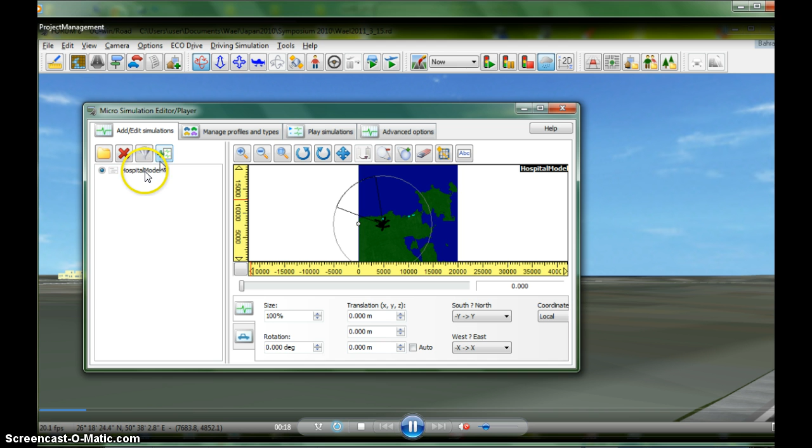As we see, we started from tools, microsimulation player, then uploaded a certain XML file inside the microsimulation player, then executed the construction process of the XML file. Inside the XML file, all the structural elements are controlled according to the time and different variables.

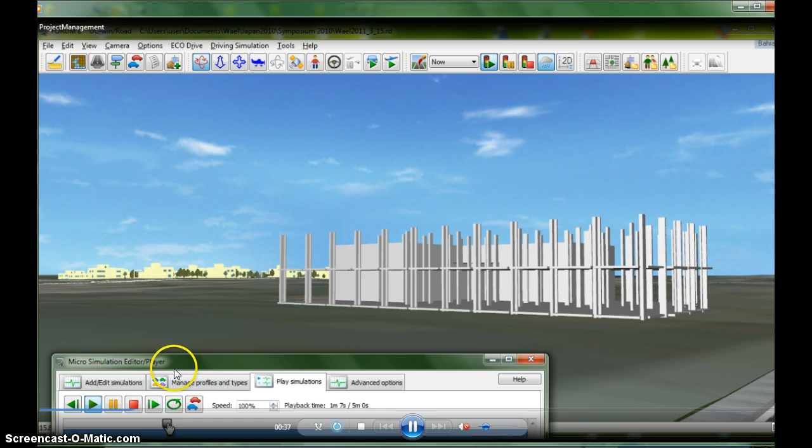As we see here, through the player, the user can accelerate the process, stop or pause it at any time, then go to different camera positions, or even navigate inside the construction or the structure, as we are going to see right now.

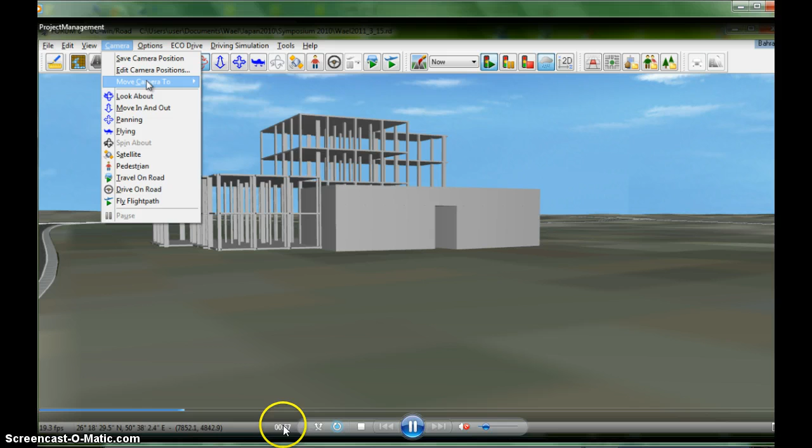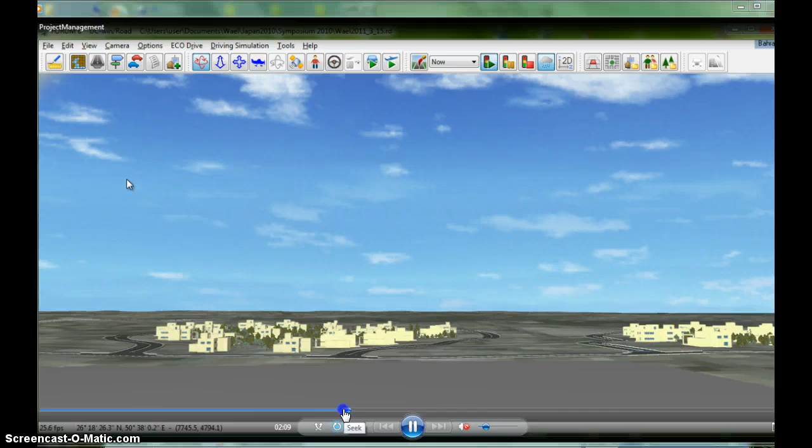I'm going to accelerate the video a bit. Right now, yes, it is the camera inside the structure, and it can navigate in different directions and even study or test the surrounding environment.

This is according to a certain scenario. As we see in this scenario, we stopped the construction process here in the left part, these two stories, then we executed the whole construction process quickly.

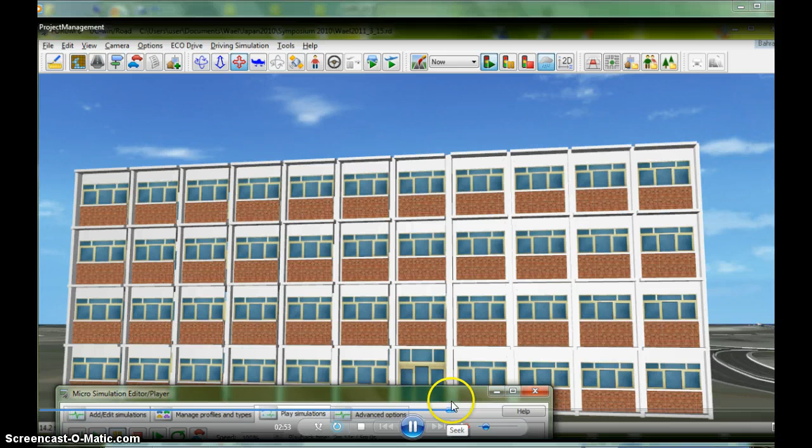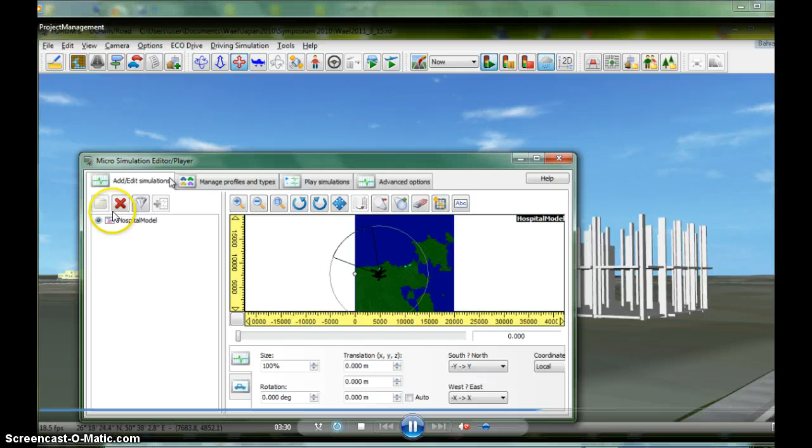Then I'm going to the microsimulation player again, delete the XML file, then upload another one. Select the file, delete it, then upload another file, which is this one, the modified one, which has a different scenario of the same structure process.

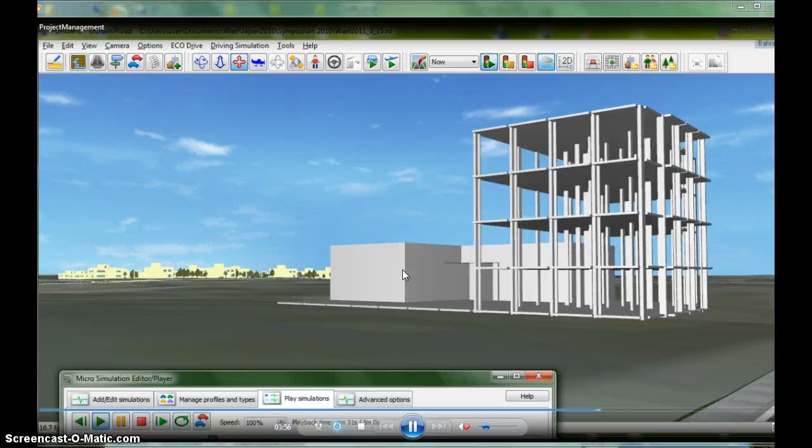As we are going to see right now, in the last scenario we concentrated on the left part. Here we are concentrating on the right part of the building, and of course you can pause the structure visualization, and navigate to different positions, whether inside the building or even outside the building, as we see right now.

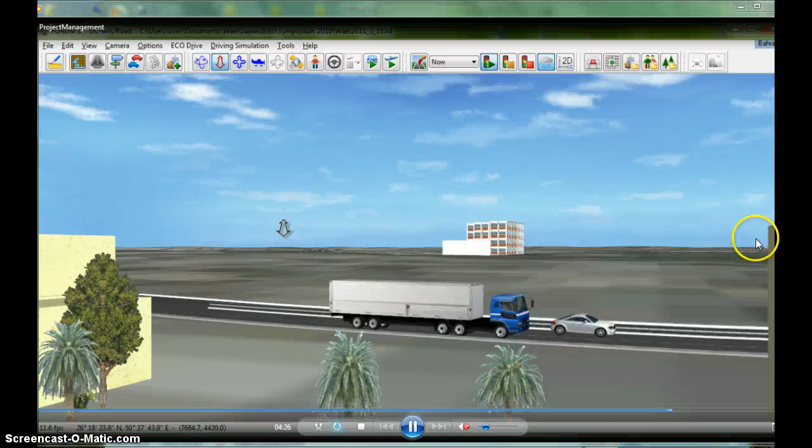I'm going to close the video, then back again to the presentation.

The steps used in making the VR structural model: the structure system should be divided into different units according to the time which each unit would be constructed in. So each group that would be constructed at one time should be gathered or grouped as one unit.

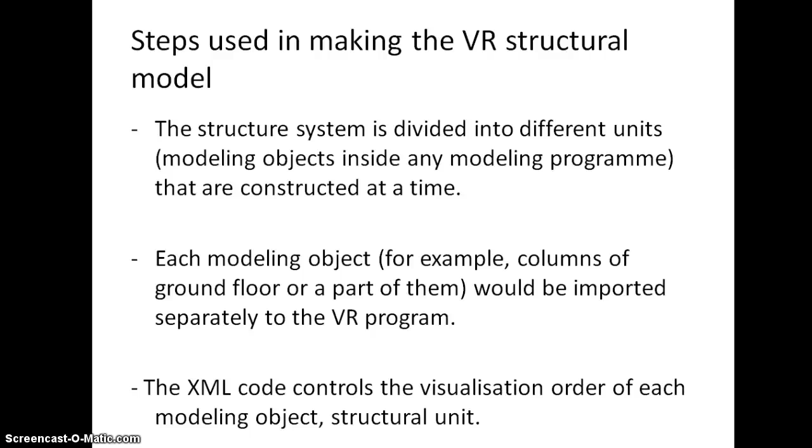For example, columns of the ground floor, or even a part of them, if we want to see them through a certain scenario as one part, then they should be modeled separately and imported separately in the VR program, either the whole ground floor columns or a part of them, as a separate model. Then the XML code controls the visualization order of each modeling object or structure unit.

These are two screenshots from previous research. On the left, screenshots of the VR program showing the structure elements at a certain stage of a construction process. On the right, the two screenshots showing the ground and the second floor of a structural system.

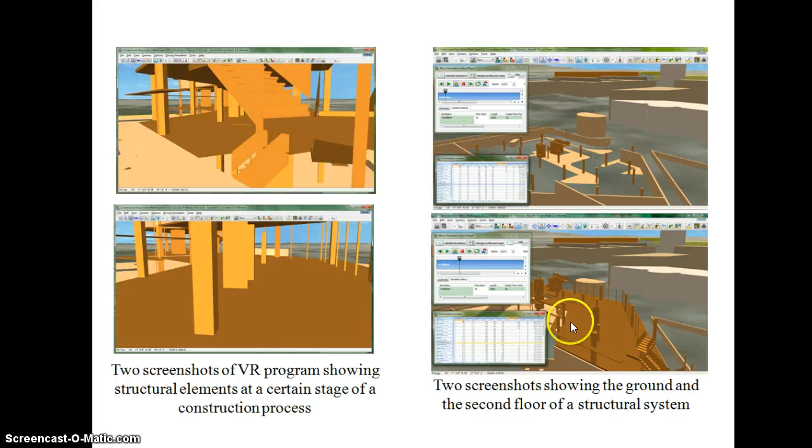In this research, I added certain textual data related to the stage itself. So in the ground floor, for example, or any stage, it has different data, constructional and structural data. Both of them can be displayed and related to a certain stage of the construction process.

Virtual reality in learning: constructivism is a theory of knowledge acquisition in which humans construct knowledge by learning from their experiences. The experiential nature of virtual reality supports the constructivist approach to learning. Virtual reality helps in teaching by providing an environment that allows users to experience scenarios and situations rather than imagining them.

Architecture design studios. The study was conducted into two design studios with the same design complexity level. They had two different programs, but with the same design complexity level in terms of zoning, different spaces, and functional relationships between the spaces.

Students were required in this design level to provide and present the details of the structural system in terms of type, structural elements, expansion joints, and span. These academically required points in the structural system were the study focus.

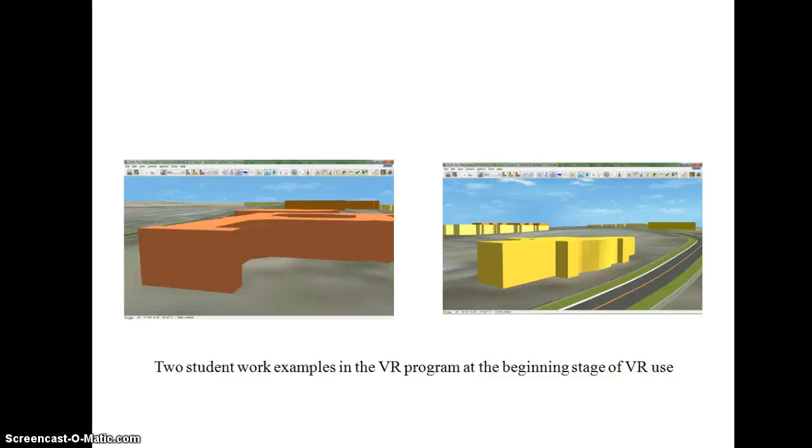The methodology used in this research was so simple. It depended on the students' records, where the students were asked to record each design decision or modification they may take. These self-records helped in revealing the design actions and the rationale behind them.

Two methodological ways were used. First, qualitative analysis through analyzing the self-records provided by students, and second, quantitative analysis through conducting a questionnaire designed to highlight the effect of VR on how students select and design the structural system.

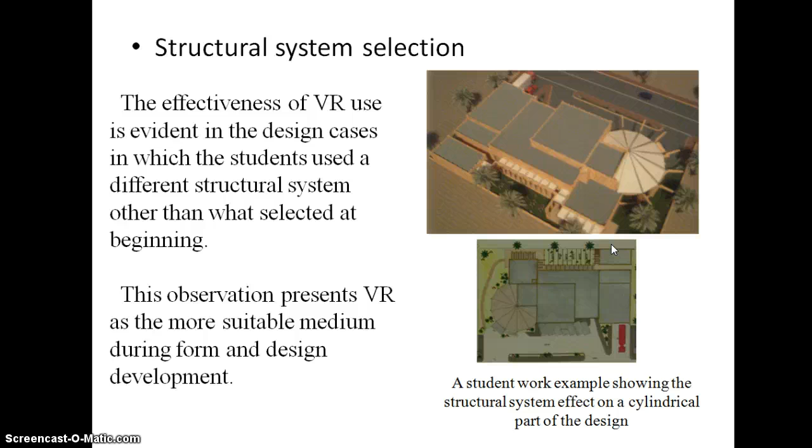Here, this part of the design, which is the cylindrical part, the virtual reality use appeared effectively in how the student finalized the design and made the form of this part.

The second part of the questionnaire: structure system elements and expansion and settlement joints. Students stated that VR use gives them more clarity on expansion and settlement joints, connections, and their spatial relationships.

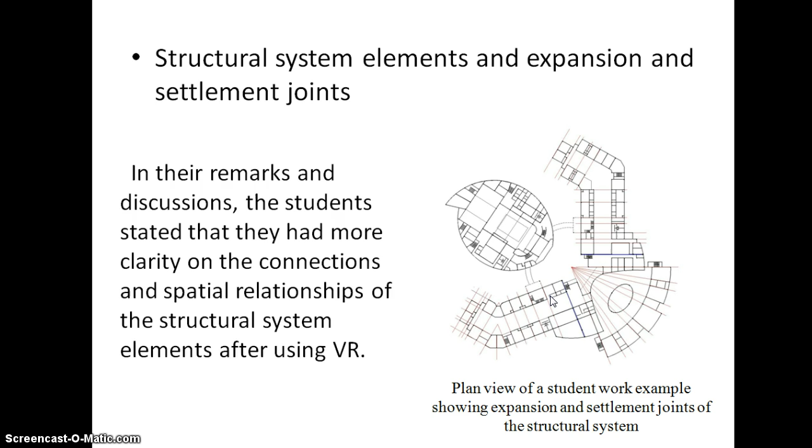Most of the students stated this in their self-records, and as we see here, a plan view of one of the students' work. The second one is constructional processes and their scenarios.

Forms and designs with many parts and elements have different scenarios. In these designs, which may be described as complicated designs, virtual reality helped those students to propose some different scenarios.

Of course, from this effect, the observation is so clear. When we have a complicated form like this, or one that can be constructed in different scenarios, virtual reality can help a lot in proposing these scenarios.

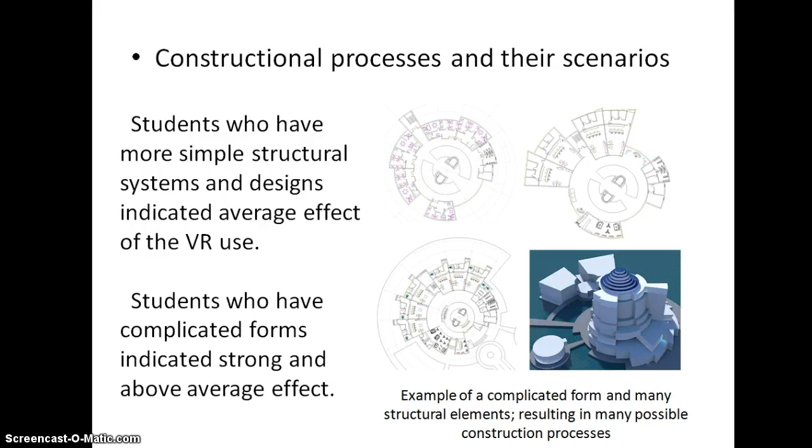The relationship between structural system and architectural design: around half of the respondents or students recorded the effect of VR use as above average and strong, while almost half of the respondents viewed the effect of VR use as average and below average.

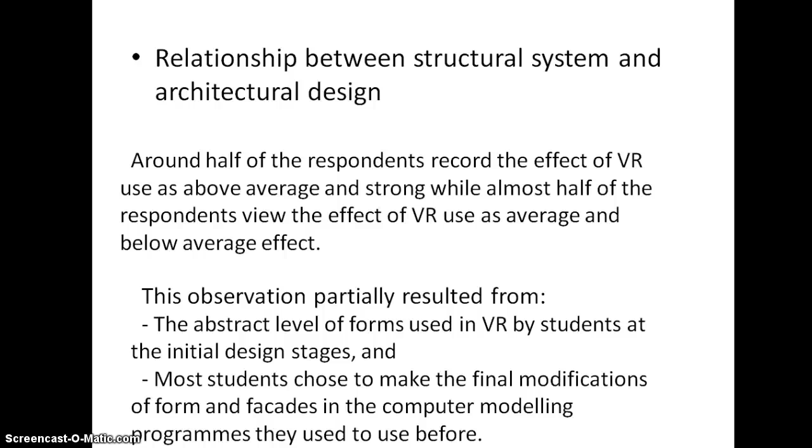This observation partially resulted from two things. One is that the abstract level of forms used in virtual reality by students at the initial design phases or stages. The second is that most students chose to make the final modifications of form and facades in the computer modeling programs they used to use before or were familiar with.

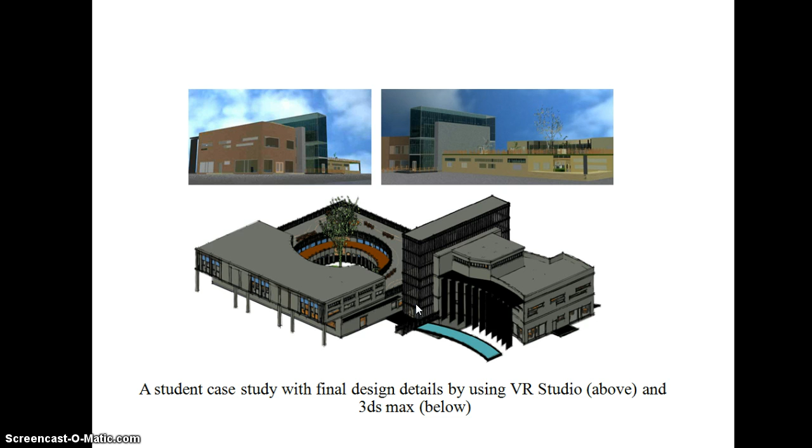This is one of the designs of the students. In the above two images here, we find the virtual reality, two screenshots from the virtual reality program, and below, one screenshot from the 3ds Max program.

Conclusion: the virtual reality use increases the awareness of the designer during the designing in terms of the structural properties and components assembly of the structural system. The individual subjective way of visual design thinking and perception, which varies from one to another, has a recorded effect on the VR use.

In other words, we can say that students who have more experience in modeling computer programs become easier and faster in becoming more familiar with the VR program.

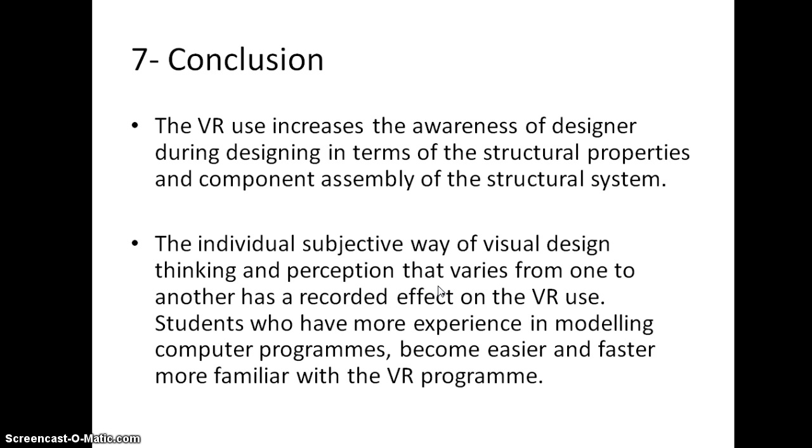A wide range of variety in the levels of virtual reality use and visual design thinking was evident among the students. However, both the simple methodology applied and the various design factors neutralized and overcame this range effect.